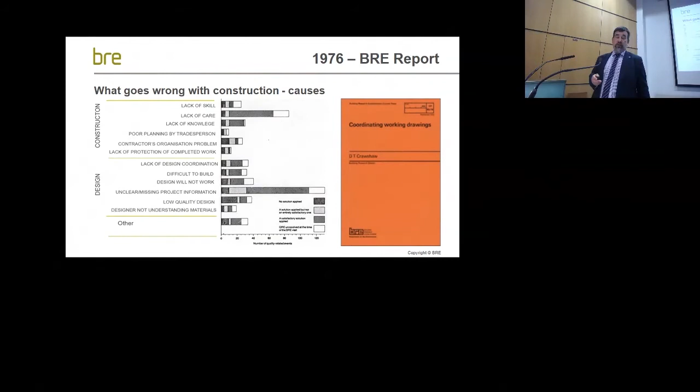The 1976 report from the BRE talks about unclear project information and the amount of cost this was putting on to industry. We've had all these reports coming out from the UK saying how construction is not performing correctly, and we're down to 'modernise or die,' of course, and then we had Carillion to follow it up.

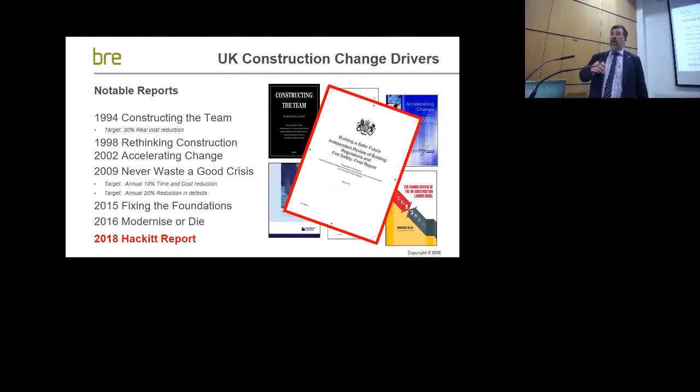But the tragic events at Grenfell and then the Hackitt report on that are big players, not just in terms of what is going on within the UK and the effects on construction, but even a project I visited here yesterday—the impact of that is being felt not just in the UK, Ireland, but across the world. And there are lots of other reports that the UK has done, basically going into all the aspects of how we need to improve.

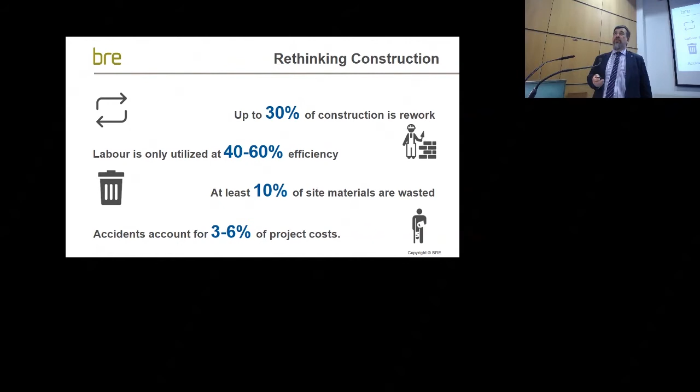Going back to things like Rethinking Construction, the figures—30%, you'll hear this, 15, 20, 30%—we know we can improve. And accidents, as Pat had mentioned, that is one of the major issues in terms of adding cost to construction.

Never waste a good crisis. That showed that actually industry was not performing, but when we did research demo projects, it could all be done, it could all be achieved, but it just wasn't what industry did on a regular basis.

Farmer, again, issues there. All the symptoms are still there for why construction does not perform, and we still actually haven't gone back and resolved those basic issues.

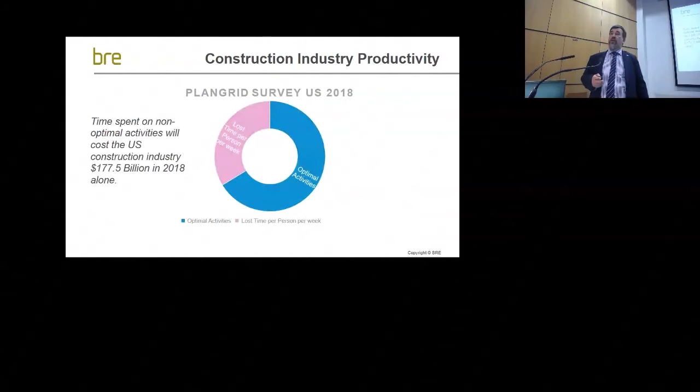And then up to last year, it's not just a UK, Ireland project—PlanGrid did a look across North America, even down to Australia, as well as the UK and Europe. About two-thirds they feel is productive; about a third of everything done related to construction is waste. That's huge amounts when you look at the profitability of most of the firms within the construction space. So there's massive opportunity to get rid of that waste and change the way that we work.

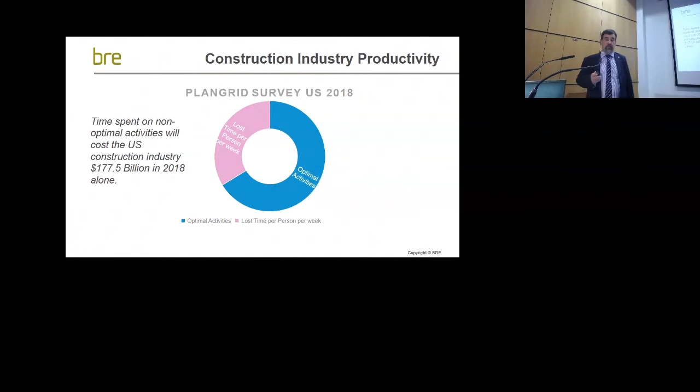Hackitt, again—one of the things that comes out of that is this golden thread of information. A lot of what I'm going to talk about today is the issues in terms of delivering that, but also the opportunities it presents.

So a quote from various reports, Production Information 2002 in the UK: information is invariably inaccurate, ambiguous and incomplete. So how do we know? Well, basic 2D drawings—you can see the architects overlaid with the engineers, we can't even align the stairs, we can't align ducts, pipes, etc. We have basic coordination issues that are not resolved.

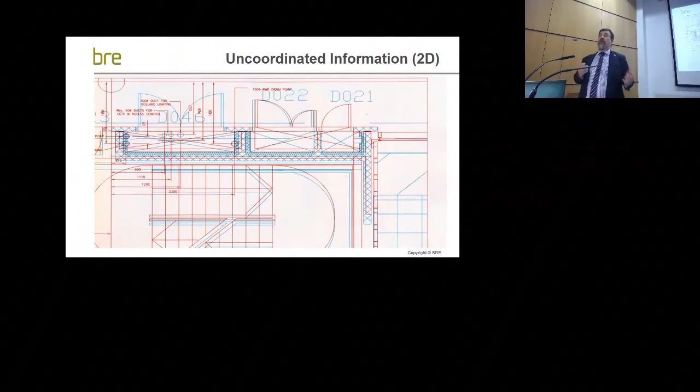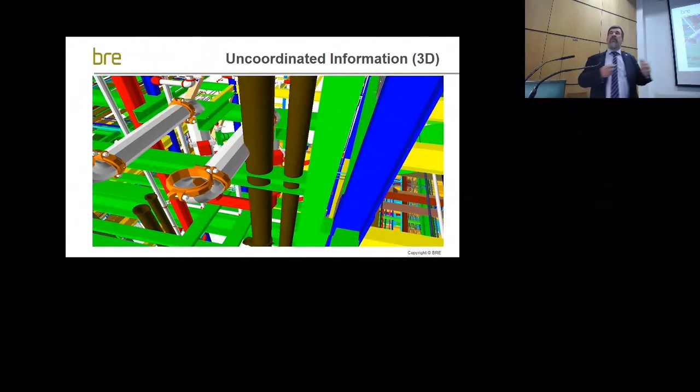Of course, 3D is going to resolve all those problems—except when you get those sorts of clashes in the middle because people actually haven't coordinated their 3D models. But then the designers say, well, it'll move on to site and it'll be resolved by the contractors on site.

So it's this blame game across construction as we keep moving things.

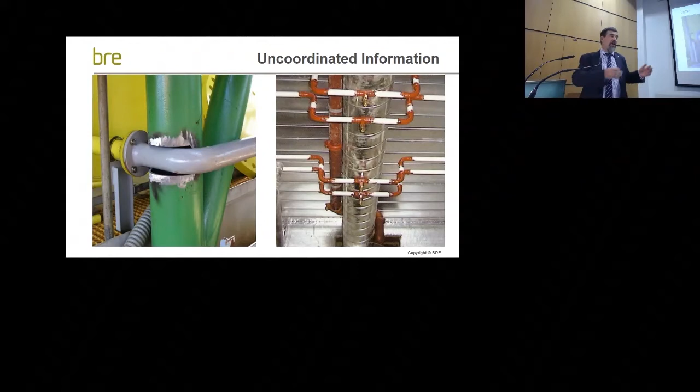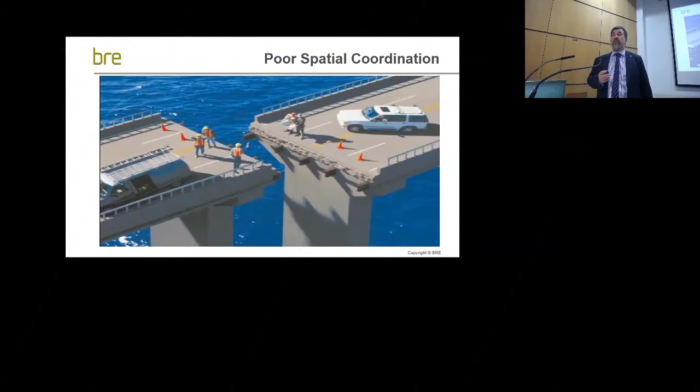And a little engineering problem: the Laufenburg Bridge, Switzerland, Germany. Something as basic as sorting out the datum. They agreed the datum would be sea level, but unfortunately one chose the North Sea, the other chose the Mediterranean Sea. A clever German engineer realised there was a difference between the two, but unfortunately he got it the wrong way and doubled the difference. So just these very basic things in terms of setting up your datums, agreeing things, establishing them, checking them before you move too far, can cause major issues on construction.

And everything we've been doing in terms of changing in construction, people put up blockers. Whether it's cost, in the BIM world, software, etc., legal - my professional indemnity insurance won't allow me to do it, the contracts won't do it, the technology is not capable. All these excuses industry puts up why we shouldn't change. But we need to change.

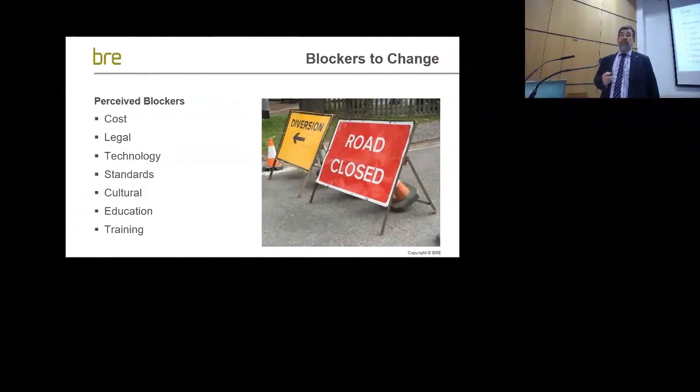In the UK, on the BIM side, all these standards were written to enable change to take place. They've now moved into an international scenario. So just recently, last month, ISO 19650 parts 1 and 2 were launched and made available for use, and these are now an international standard to allow adoption of what was originally the UK BIM Level 2 to take place.

So BIM, what is it? I'm just going to give you a quick basic overview of what we're talking about. It's not just 3D CAD - we were doing that in the 80s, it's not new technology, there are people doing it now. But I like this definition by the UK BIM Task Group about collation and exchange of shared 3D models and intelligent structured data. And it's that intelligent structured data which is going to change design, construction, operations and maintenance.

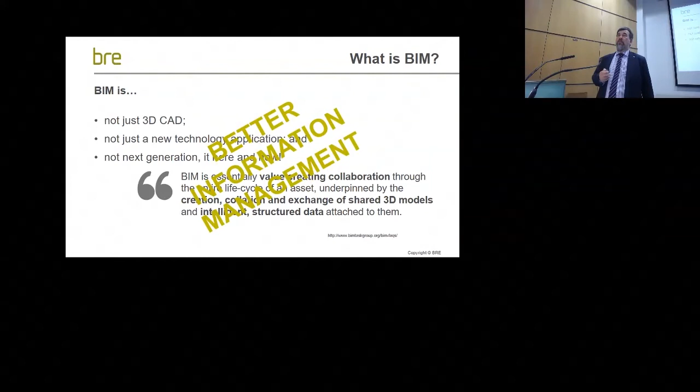It's going to change the way we all work. But it's also about this - it's about better information management throughout that whole process.

So the trouble with BIM is we can't even agree what the definition is. Some people are talking about BIM as the information model - they buy a piece of software, create a 3D model, and say they're doing BIM. Other people are delivering new things from that model, so actually how they go about modelling to extract cost, visualisation, construction sequencing - the modelling process depends upon what deliverables they need to deliver.

And then we get the information management bit, the whole BIM Level 2 from the UK, which is the whole process of how you manage the flow of information and control the flow of information. So we have what thing is produced, how that thing is produced, and then who produces what and when - three different things. For the bottom one you need to do the other two, but unfortunately people can go and buy a piece of software and say they're doing BIM without worrying about the other things involved with it.

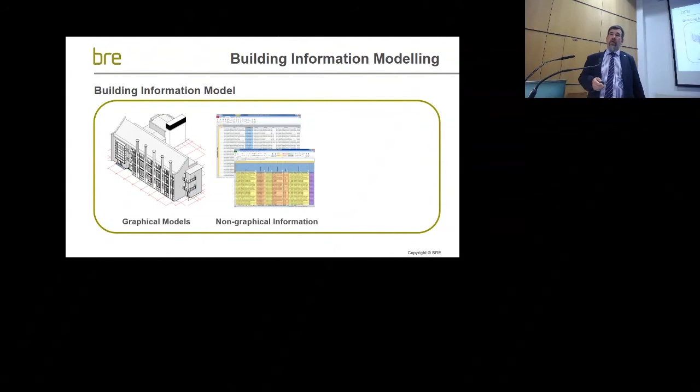So we need standardised definitions of what's going on. When we talk about BIM itself, the graphical model - that's the flashy bit, that's the bit everybody likes. But equally important to that is the non-graphical information. If we're going to get to this structured data bit, that's the bit that's going to change the industry. And if you think about those two, from that we're going to get the documentation. As long as these are coordinated, the documentation is just reports from the databases of the graphical and the non-graphical information.

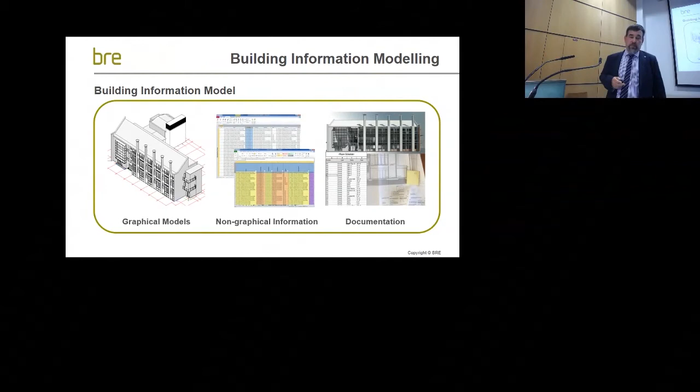Now, I speak at events globally, and within the UK, BIM Level 2 has been the big push. But globally, it's Industry 4.0 or Construction 4.0 they're talking about - how big data, AI, use of IoT, drones, off-site prefabrication, virtual realities, augmented realities, mixed realities, all these sorts of things are going to change the way we do construction. And these things are happening - there's plenty going on which is driving these agendas. It's just about how much of this is all joined up that's really where the benefits are going to be.

One of the other pushes is digital twins. So at the BRE, our Integer House, and actually most of the site of the BRE, we've got a full BIM model there. This particular one is used as our smart home, so it's full of sensors, but then we've linked the data from the sensors into the BIM model. So we can then visualize the BIM model based on current sensor data, and we can actually get IoT linking into BIM to help us look at how the building actually performs.

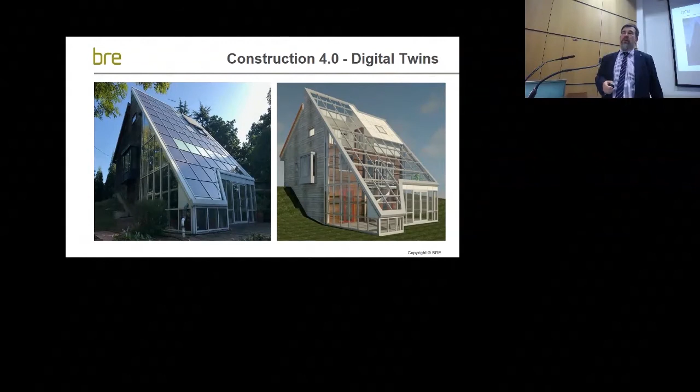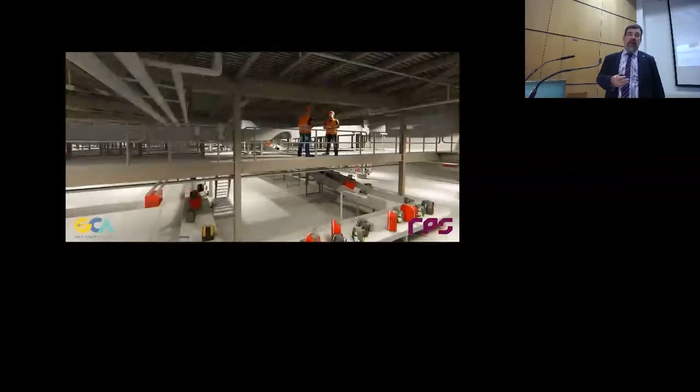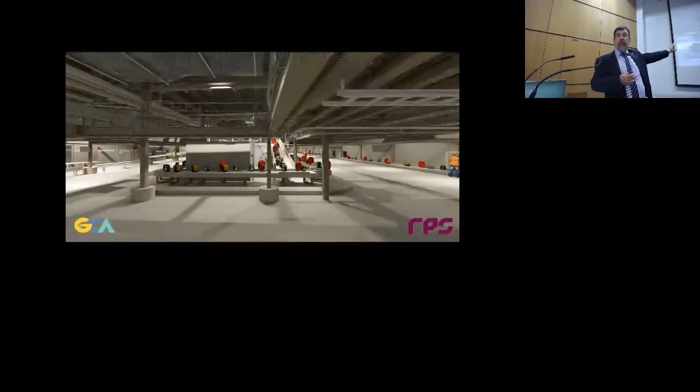This just shows some of the technology available to us. This has been carried out by the RPS team here within Galway, and it shows the capabilities of the software that's presently available - the fact that we can go from point cloud data and turn this into actual models, by a team, some of whom were trained at GMIT, working in Galway on a project on the Gold Coast of Australia, the other side of the world.

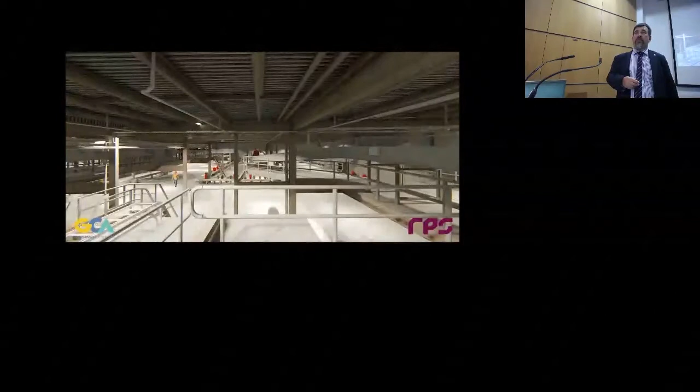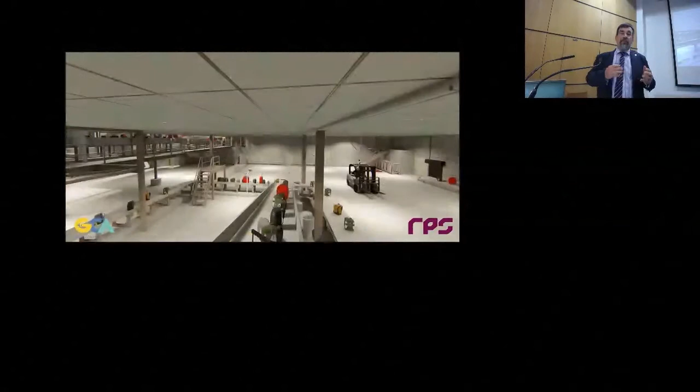So we are in a global economy. Work is not just fixed to one location, and it depends on the skill sets, the knowledge, the use of this technology in terms of how you can improve the way you want to work. They can see the visualization - we're no longer showing 2D drawings to clients. They can actually see how things are, not just in the design and operations, but in future use.

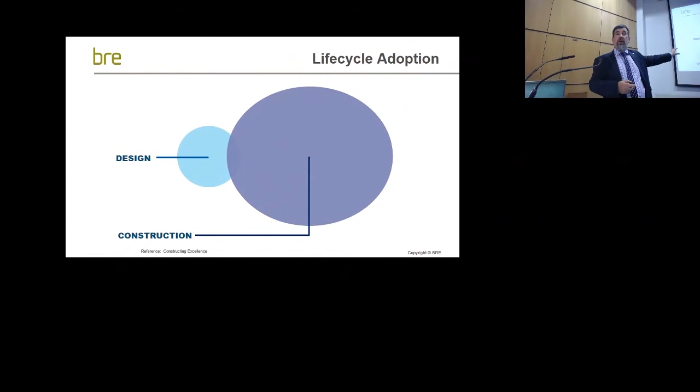So with BIM, the whole perception was - and this comes from Constructing Excellence - that BIM was all about design and construction. But the reality is something else. That design and construction is tiny. If we can sort the structured data out in that bit, that can push into the operations and maintenance, into the business costs and the business outcomes. We can change the way that we all live by resolving a lot of these things.

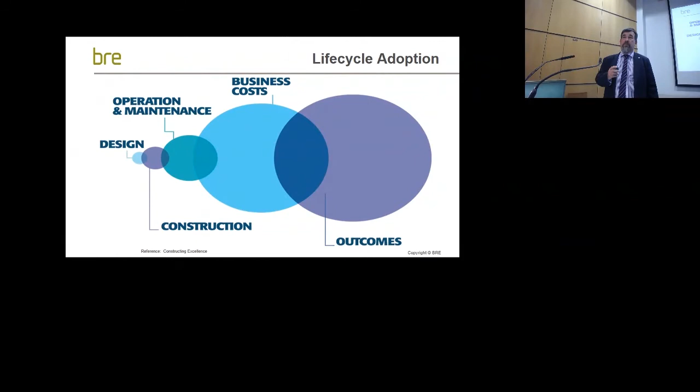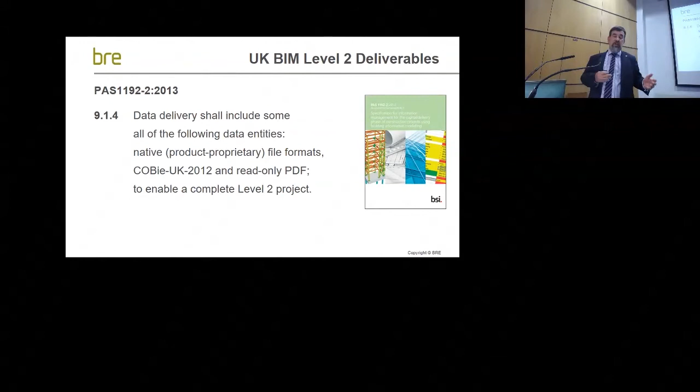But there are a few technical issues to sort out. One of the big pushes within the UK was how we dealt with delivery information, and the requirement in the UK on BIM Level 2 was to deliver this thing called COBie.

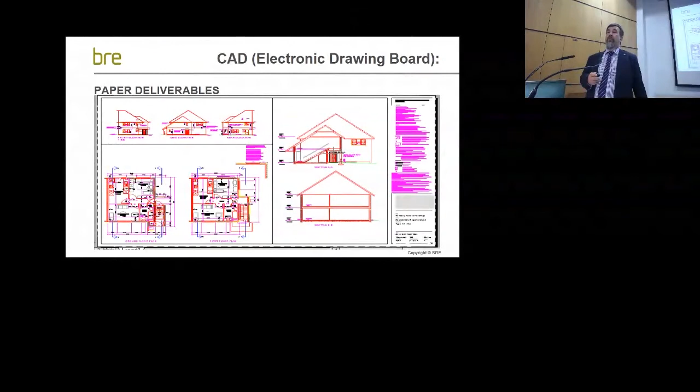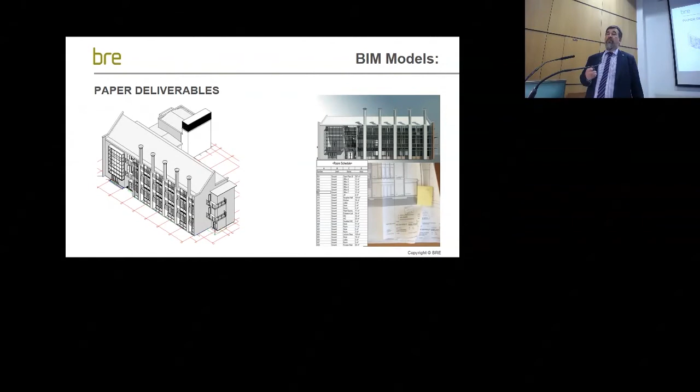So when I started, delivery was easy - it was drawings on the drawing board. We moved to CAD, we delivered paper. And then a lot of people moved to BIM, and they still delivered paper - prettier paper, more colours on it, but they still delivered paper. And then suddenly we had this requirement to deliver COBie.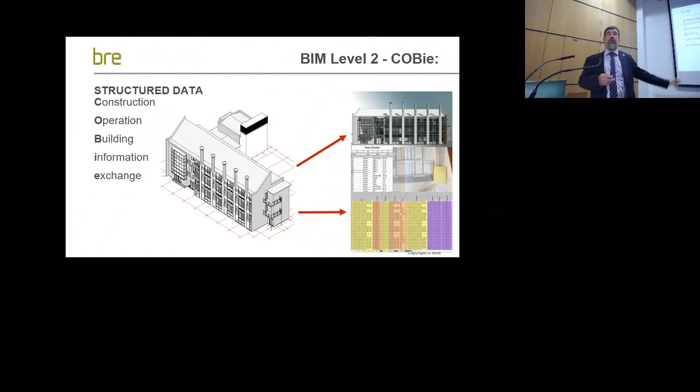COBie as structured data. And suddenly, what you call things becomes important - the namings, the attributes, all the information you put on your model is actually going to be used by people downstream. So suddenly you need to start controlling that flow of structured data.

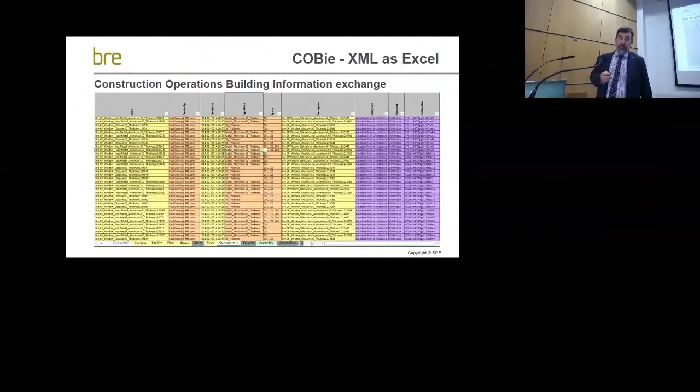Now the perception was this thing, a BIM object, was going to resolve that problem, because it had the visualization information, it had the non-graphical data and the symbology, and you could use that non-graphical information to meet your requirements.

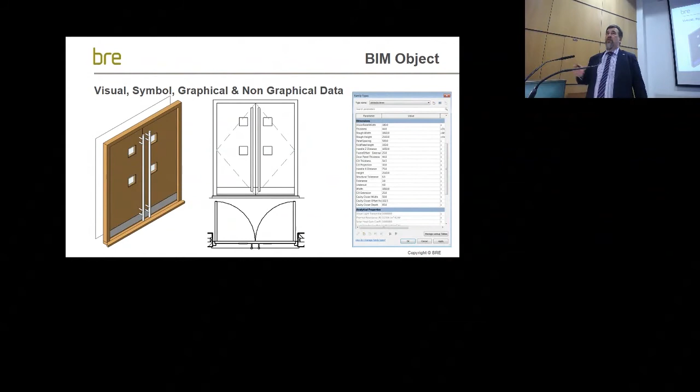But the trouble is, a lot of these were created by various vendors. So everybody saw this massive opportunity to go out and get manufacturers to create BIM objects, and they could sell them and host them for them. And so we've got BIM Store, National BIM Library in the UK, Revit Store, BIM Objects - but they all did it differently.

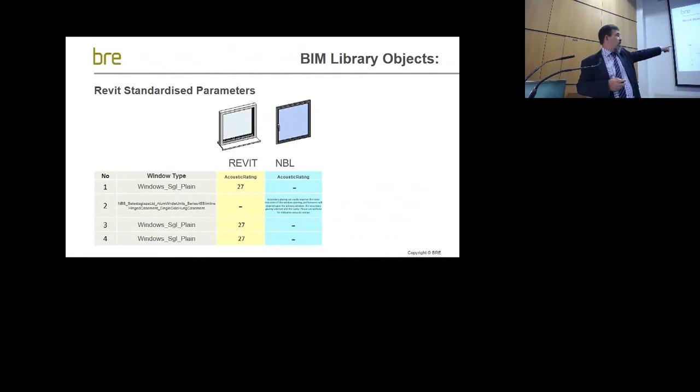So just taking a wall and putting 4 windows in it, I did a little exercise. We can see we've got the 4 windows scheduled out, and we have 1 value for acoustic rating. I then put in a National BIM Library window, and whereas I have a number against my acoustic rating, they have almost a full specification as text. Then we brought in BIM Store, and they have another acoustic rating which is a formula. And then BIM Objects, who just call it acoustic, actually have a URL to where the value is stored.

So if I want to extract structured data for acoustic rating, which one of those 4 columns am I going to get? That's the problem that we have. What data type am I going to get? That's the problem that we have. And we need to resolve this if we're going to move forwards.

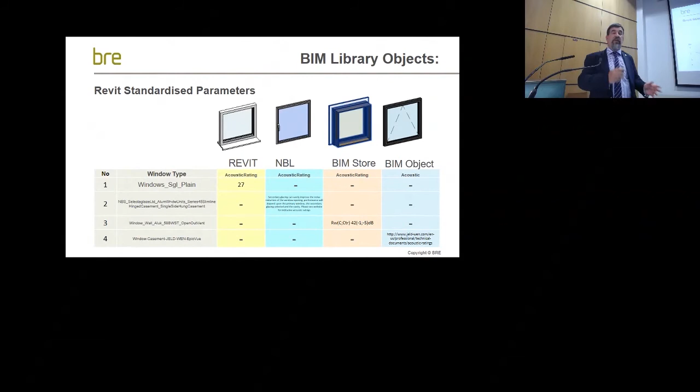National BIM Library - so a window for one of their manufacturers, and there's all the information associated with it. There's the next page, and the next page, and the next page - 6 pages of this data associated with the window.

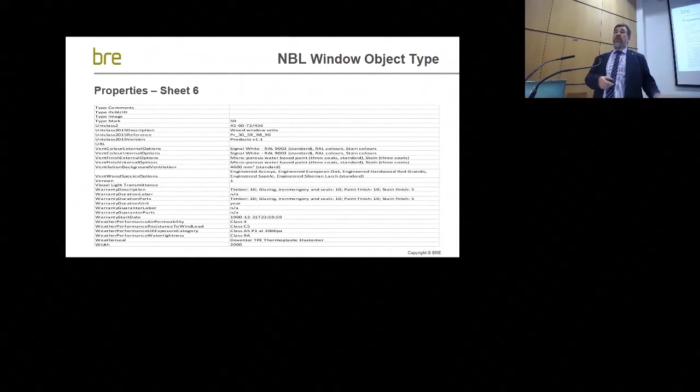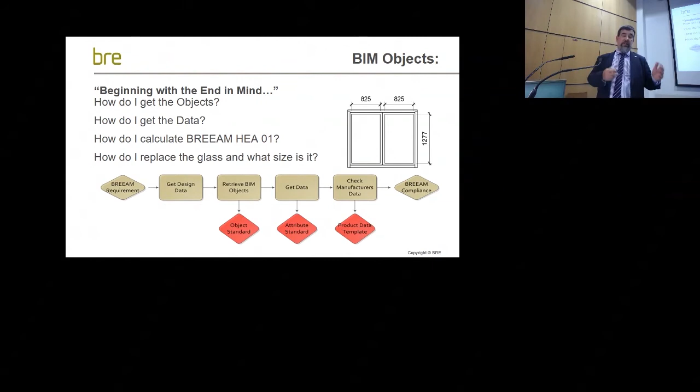What it doesn't give me is, what's the size of the glass? Something as basic as that, if you're trying to work out the daylight coming in through that window, or the thing you're most likely to need to replace in the window when the glass breaks - you don't have that information. So this whole 'start with the end in mind' scenario has been lost, where people are not thinking about what information needs to be delivered for operations and maintenance. And then how do we deal with automated regulation checking of these things if we don't have the core information that we need?

So we've been doing some work over the last 3 years at the BRE in terms of trying to standardize data templates. So we create a template for each object and we define what information, the formats, units of measure need to be associated with those. And we've created an ecosystem that we've used on various research projects, etc. So we have data templates, and then we have methods for manufacturers to populate their information against that data template.

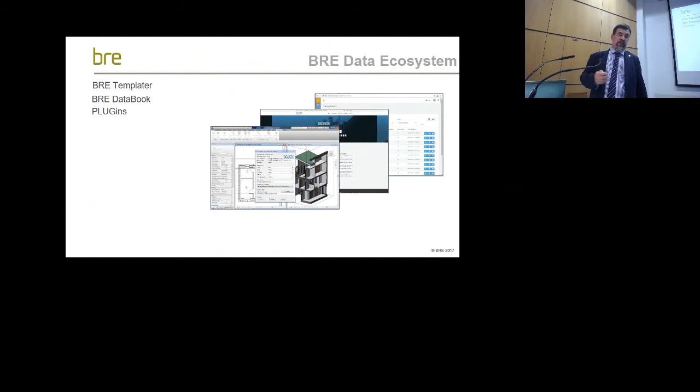We then have plugins, so authors can put it into particular tools or even into some of the viewing capabilities. We can then use things like COBie to extract structured data. Because we put the information in to a standard, we can now extract it, so it can now be useful. And it can then be taken into FM solutions to give them the information that they need to maintain and operate. So we've got this whole data flow working in a standardized way.

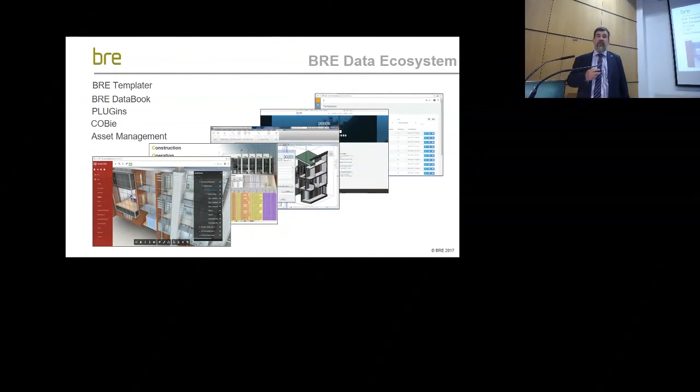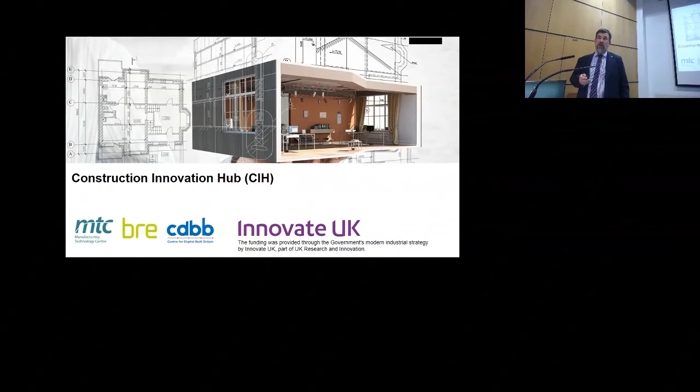But the work we were doing was very limited. And something that has changed is that the UK government has actually recognised that they need to invest in construction. And we now have this Construction Innovation Hub project between the Manufacturing Technology Centre, BRE and the Centre for Digital Built Britain, with sponsorship from Innovate UK. Now, I've heard you've had this scenario in Ireland that the government's invested in lots of these other sectors - that's what's happened in the UK. But now, actually, we have got some funding for construction.

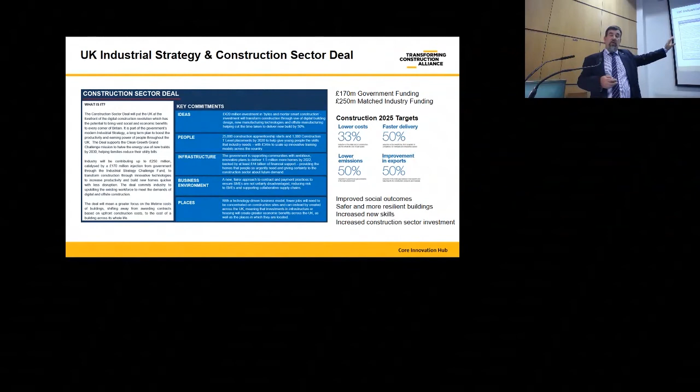In the UK, we've had the 2025 reports in terms of how construction needs to be 33% better in operations and maintenance as well as construction, how we need to deliver faster, etc. So there's big drivers for change which are pushing this by the UK government. But they have put their money where their mouth is - they've provided 72 million for the initial project to really look at how we can change construction for the better.

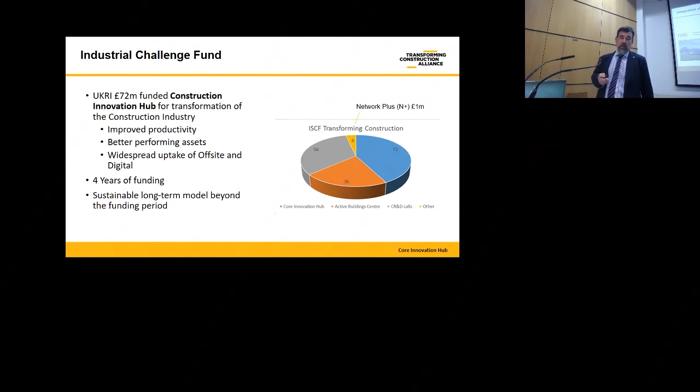So the 3 parties, the Manufacturing Technology Centre, generally based up in Coventry, BRE and the Centre for Digital Built Britain, all have different elements that they're looking at. One of the first packages that comes under my remit at BRE is looking at how we deal with product data and how we look at digitisation of the building regulations. And those issues that I've been talking about for several years, we now have actually an opportunity to get on and to start to resolve.

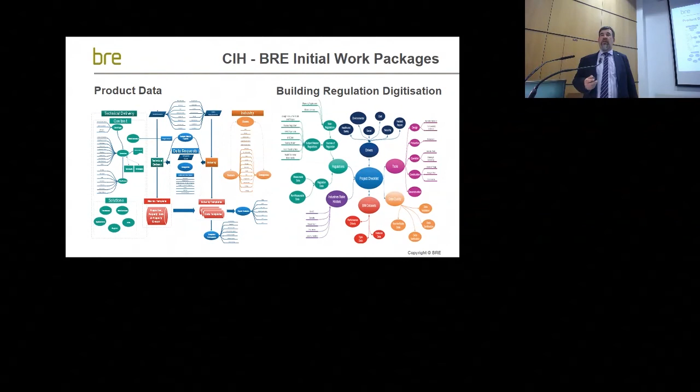So the issues in terms of all the information from brief, specification to construction to how we maintain, operate, refurbish, etc., they all define data requirements that we need to capture. The manufacturers all have their data, and if we can basically get the requirements and the manufacturer's data, we can then start making decisions based on structured data, not on guesswork. And that's going to change a lot of the way we can do things.

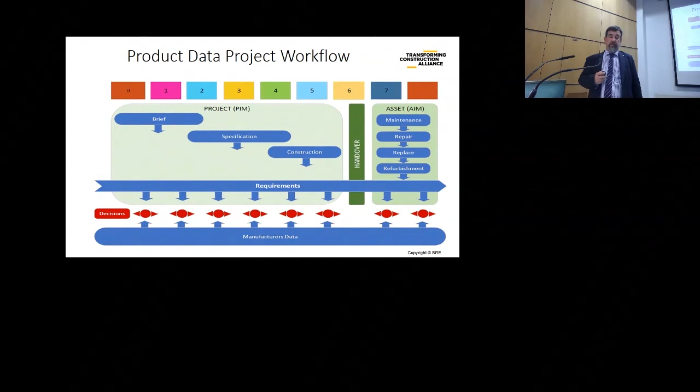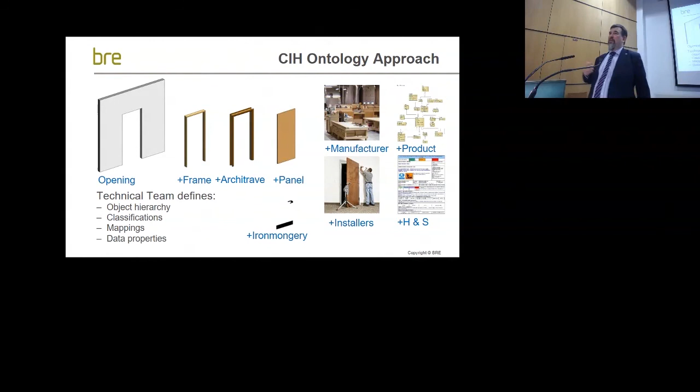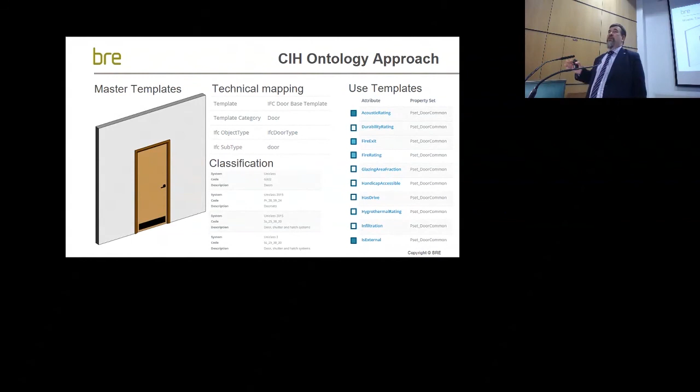The whole structure of these things, we have a process in terms of we're looking at it as an ontology. So when you're looking at a door, you're no longer just looking at a door, you're looking at all the components of it and the data associated with those. And then general things about manufacturers' general information, the supply chains, products, all these things together to allow decision making. And then the use of AI and these other things can then start to use this to help inform decisions. And that allows us to basically have master information and then particular use templates to meet particular requirements.

Now, one of those will be automation of regulations, etc. But the issue is at the moment we have things like manufacturers' data, we have requirements, but that needs to tie in to the instance in a particular location. So by standardising all these different data sets, we can then start doing formulas and rules-based stuff to actually take these things on board to help make proper informed decisions so that the thread that Hackitt talks about can actually be achieved.

So Construction 4.0 is happening across the world, from South America, China, as well as the things going on in Ireland and the UK. There is fantastic opportunities for change. We know that the old ways of working are not productive, that we need to change, and really there's an opportunity for the new generation coming through to embrace that change and actually make it work.